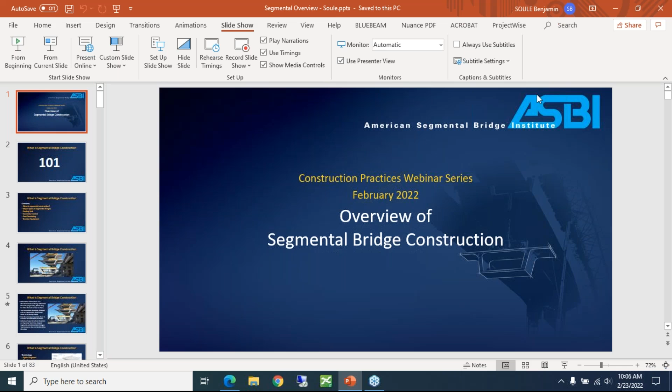All right, well thank you very much. I'm thrilled to be here today to talk to everybody, and I can assure you that that picture you saw was about the midpoint of my anniversary, but I'm at least confident that my picture is not any older than the one that Tom Stelmack had there.

So today, this is meant to be a real basic grounding in segmental: what it is, how it works, what the terminology means, how things are cast, how they come together. So if you've had questions you've always wondered about, never really understood what a term meant, or how things really come together, this is the place. Don't be shy to ask, this is what it's for.

If you are an old hand and have been to 15 different ASBI conventions and built a handful of projects, you may not learn a whole lot, but you get the PDH either way, I suppose.

So a quick overview of what we're going to talk about today: what segmental construction is, run through some of the major types of segmental bridges, and just talk about how they come together. We'll look at a casting yard, how a casting yard works, geometry control, post-tensioning, and erection equipment. This tends to run a bit long, so I'll try to auctioneer my way through this presentation.

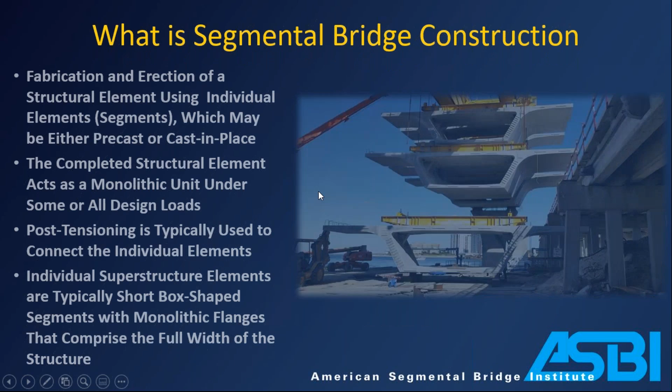So what is segmental bridge construction? Well, segmental bridge construction is a technique where the bridge is divided up into pieces. Whoa, that is not what I meant to do. Well, I'll leave the picture on there, it's a little better to look at.

A lot of people in bridge construction are familiar with the idea of working with girders, taking longitudinal slices of the bridge for each girder line. Segmental construction is really 90 degrees to that. The bridge you want to build is cut up into slices, so you take transverse cuts along the bridge, and those pieces are fabricated individually, either on site as cast-in-place, or off-site as precast.

These pieces on average are roughly 10-foot slices. If you've got special conditions, you can do a little bit longer or a lot longer than that, but order of magnitude you're dividing the bridge up into 10 to 15-foot slices, making each piece individually, and then assembling them on site to create the completed structure. And that's where the post-tensioning really comes into play.

A little bit of terminology on some of the parts and pieces to get oriented. A typical segment is what you see here, sort of along the length of the span, the basic shape. A lot of segmental construction, probably close to 90%, uses this basic trapezoidal box girder shape, proven to be efficient and economical. So a typical segment is just one of those 10-foot slices you'd find along the length.

A pier segment tends to be a little different. When you get to a pier, you're transferring a lot of load from the span into the substructure, so you're going into bearings a lot of the time. Sometimes you might have a monolithic connection, and there's a lot going on there force-wise, so you need a diaphragm, this concrete infill, to achieve that transfer from your typical section into your substructure.

A variable depth segment: a lot of times if your spans get longer, you want them deeper to give more capacity at the pier, and you can see that as it heads over this way. Usually you keep the top part the same and the bottom gets taller as you go towards the pier, so you'd be skinny in the middle of the span and taller at the pier.

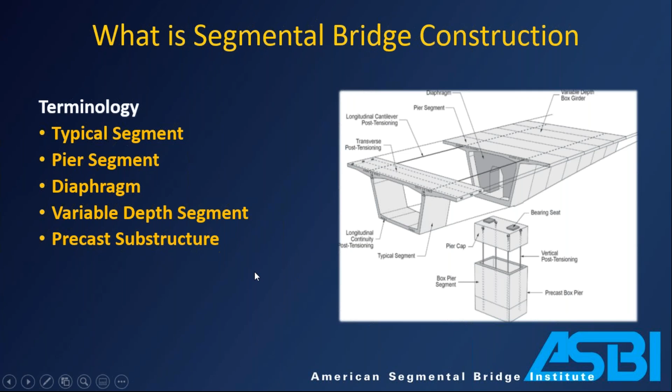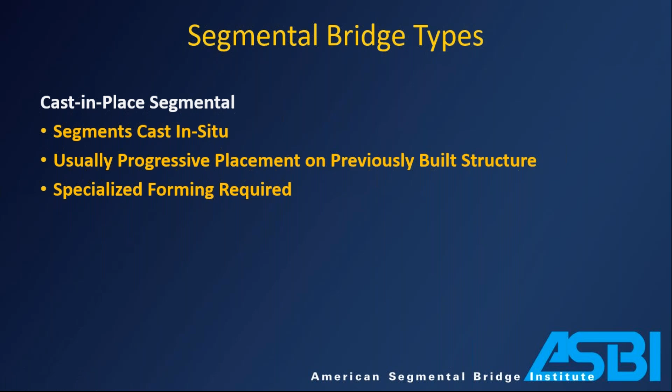First we'll run through the different types of segmental bridges, starting with cast in place segmental. This means you are casting these pieces more or less right where the bridge is going to exist, along the alignment, working your way out in pieces, in segments. Mostly this is used as progressive placement of some kind on a previously built structure - you're building your way out, and you have a lot of need for specialized forms.

By far the most common bridge in this category is a balanced cantilever. A lot of times you'll see 3-span balanced cantilevers done cast in place - that's a very typical usage. These are usually in response to one-off difficult crossings - maybe you need to get over a river, rail yard, highway, something else. You need a longer span and you have pretty poor access on the ground, so you'll see that for the main span, and the construction technique really lends itself to a 3-span configuration.

The way it works is right there in the name - it's a balanced cantilever. You are building out from a pier in cantilever, starting at the central pier and working your way out - that's the cantilever part. The balanced part is you're doing it on both sides, so you don't want a big imbalance from one side to the other as you build. You're staging your way out, working from the center, balanced cantilever. When the cantilevers coming from two adjacent piers meet, you secure them together and cast a closure.

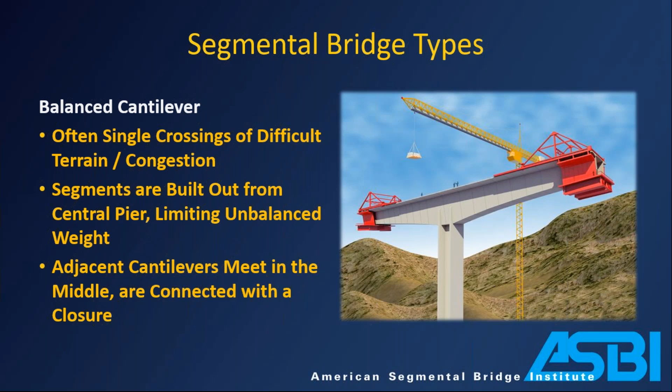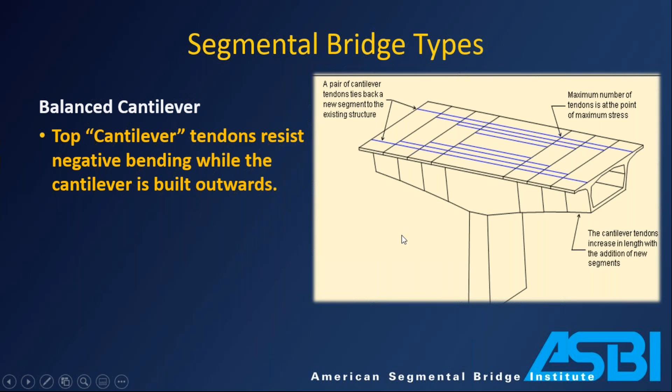You have a continuous span. For a lot of these I'll give a schematic of the PT. While you're building the cantilever, you are stressing cantilever tendons - these are the tendons you see here in blue, in the top flange, counteracting the negative moment from the dead load cantilever. Every time you cast a segment, you're stressing a tendon to counteract the action of that segment. This is a cutaway view - obviously the bridge doesn't look like this - looking at the bottom slab.

Another type of cast in place bridge is cable stayed. These are obviously less common, and really just an extension of the same logic - you have something that's difficult to cross. In this case they're usually a whole lot bigger than what you'd do for a cast in place balanced cantilever, getting up into the 1,000+ foot range - these are major crossings. The concept is very similar - you're really doing the same thing, building your way out in cantilever from a center pier.

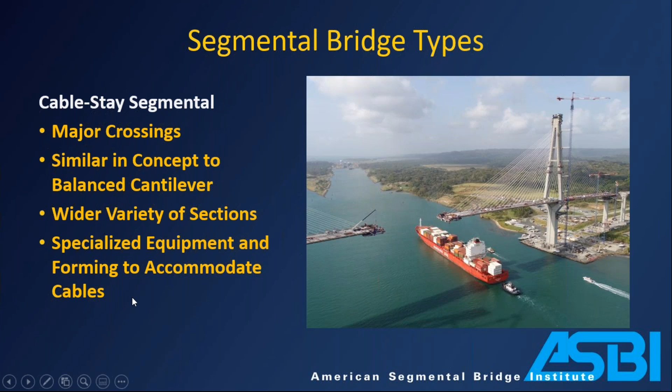In this case, you're substituting the cantilever tendons for the stays, but they're really playing the same role. They're giving you that capacity to handle the bending as you work your way out. The one major difference between the two, other than the cables, is you need to find a home for these cables, a way to anchor them. You have a real big concentrated force in a real small area, so you need to find a way to put that force into your structure safely.

A couple of ways you do that: you see a lot of anchorages along the edge, that's the edge girder type application on the left. You'd have that on both sides of the deck, running your way out. It looks a lot like a typical blister, only difference being they're usually a whole lot bigger.

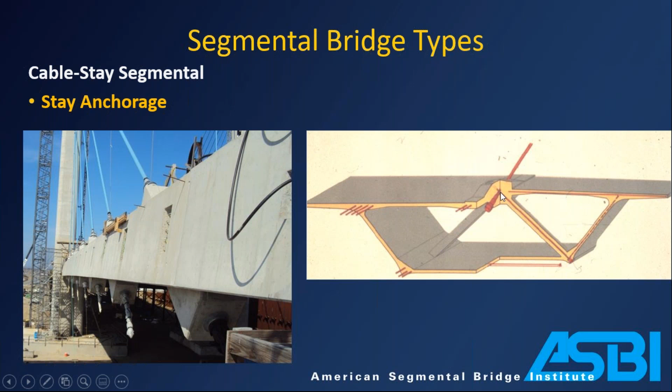The other one is on the right, an old picture. This goes way back in segmental, but it's the idea of a delta frame. There are different ways to put this together, they can be concrete or steel, but what it is, is a way to take the concentrated load coming from the stay and distribute that load into the webs of the structure. You have a vertical load, you want to get that into the webs, so that delta frame does the job of distributing the load. And then you have a big blister to house the reaction from the stay cable.

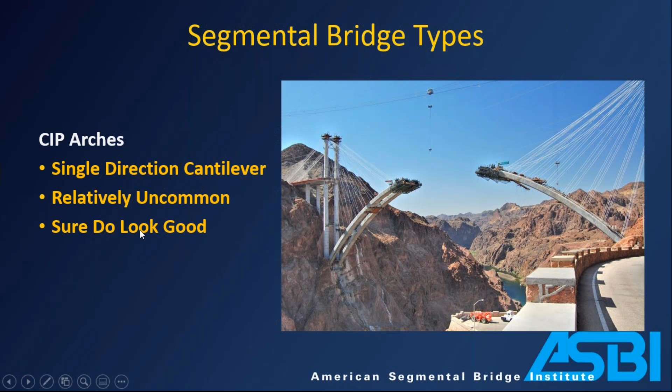Getting even more rarefied, you can use cast in place segmental for arches. Pretty similar, but in this case it's not a balanced cantilever situation, it's a unidirectional cantilever. You need a way to keep that under control until you have continuity. In this case, this Hoover Dam Bridge, they're using these temporary stay cables to stage it. Once they meet in the middle, there'll be a closure pour and those cables will be taken down. You don't see it very often, but they really are impressive when you do.

Relatively rare, but it's good for certain circumstances where you have poor access on the ground but don't want to make an investment in major equipment. There's not a lot that you need here to make this work, so it's one that you see that falls into the cast in place segmental family.

Touching on the PT for those incremental launches, you can sort of intuit as you're pushing this thing across, you're going back and forth between positive and negative moment. You're supporting it everywhere at one time or another. So you need tendons really every which way, and they end up looking like this. You have tendons going up and down, and really you're just compressing the heck out of that section to make it work as you push it along.

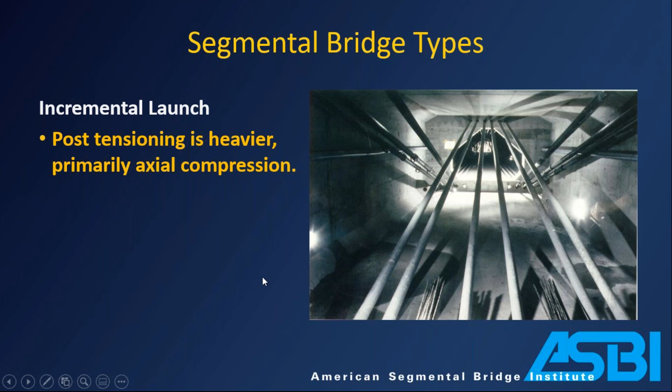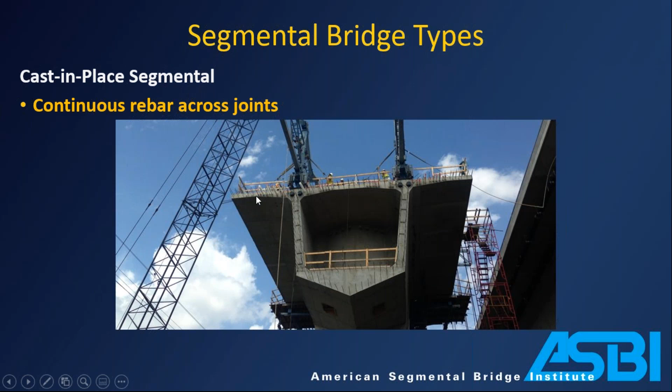Something to point out about all of these cast in place methods is that because you're casting directly against the other segment, you have the opportunity to have continuous rebar. That's what you see here in this picture, the segment that was cast earlier. They're going to cast another segment against this, and you can see a lot of rebar sticking out. Because your first pour is your final pour, they never come apart, and that gives you some advantages. You can see there are not a lot of shear keys on the face of this segment, you don't need that as much because of the continuity from the rebar sticking out.

Now switching gears a little bit, I'm going to talk about precast. In precast, it's an entirely different situation. The segments are precast offsite, they can be quite far away, 100 miles away. They are transported to the site and assembled. You usually need some specialized equipment, both in terms of casting the segments, you need the forms and molds, and to assemble the segments. This tends to be used in more high volume situations, maybe you have poor access, a job over water, somewhere you can't put down falsework, a congested city, something like that. But you do need a fair amount of volume to make the investment in the specialized equipment worth it.

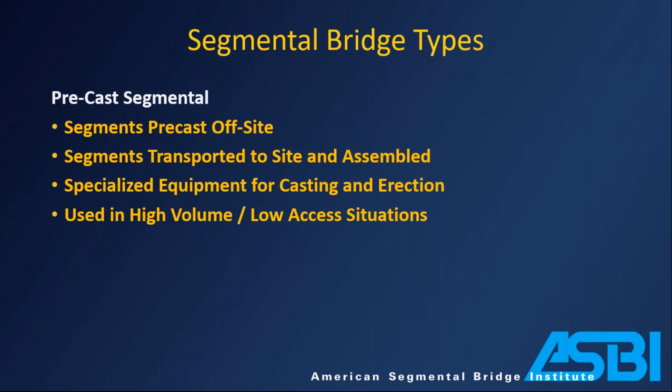So going to walk through the basic types for precast segmental, starting with the easiest one, and you can tell it's the easiest one because it's called simple spans - span by span erection with simple spans. It's the very first thing you learned in an engineering class, just a beam supported on either end, free to rotate, easy. You can almost design it by hand.

So it's just a simple span supported on a pier on either end. It's probably the fastest way to build - there are no closure pours to deal with, you can just keep going, and you have the shortest erection cycle. The downside is it's a simple span, so it's going to have the most limited span range. The sweet spot for these is on the order of 120 to 125 feet. You can see a little bit of nibbling around the edges on either end, but that's roughly where you're going to live with that type of construction.

Next - oh sorry, forgot PT. So the PT is, again, very simple. It's self-contained within the span. It anchors in the diaphragm on either end, and it follows a drape pattern to give you resistance to the positive bending that you see for a simple span. So very straightforward, kind of easy to understand how that works.

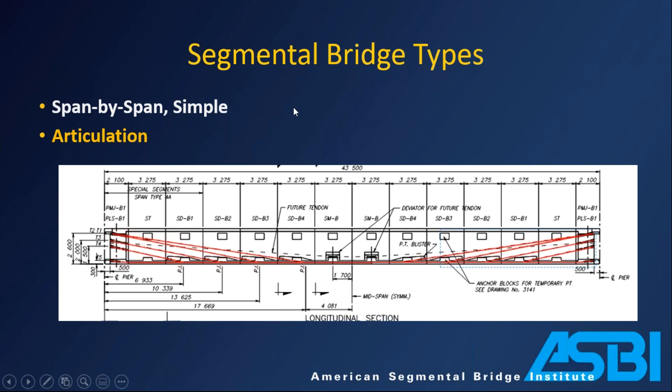The next step up in complexity is span by span made continuous. In this case, you are still building one span at a time, working your way along the alignment. The difference is with each span, you are creating continuity with the previous spans. This is done with a combination of closure pours between them and post-tensioning that overlaps. So it does have a slightly longer erection cycle - you have to take some time to put in these closure pours, a day or two on an erection cycle. The reward is it allows you to push your span lengths out a little bit longer.

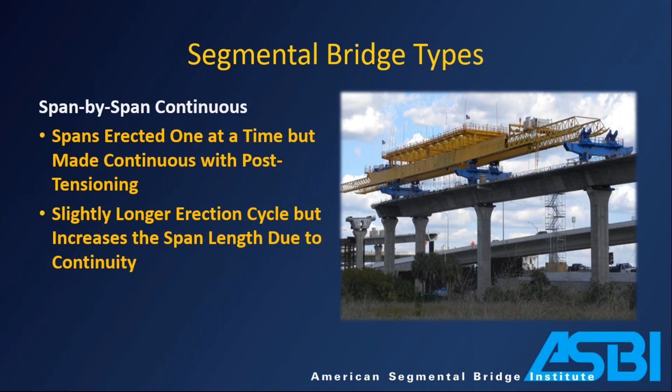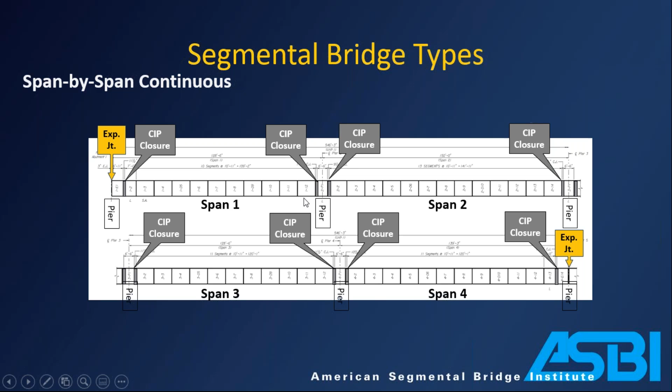Here's a schematic of how that looks. This is a 4-span unit. You can see there are closure pours at the piers, to keep the geometry going well and to create that continuity from one span to the next. So there are a number of those to pour as you work your way out.

It's subtle - a lot of people would look at this and say, well, that's the same PT you just showed me before. The difference is over here: if you look at this pier segment where you have continuity, you'll see these tendons overlap with these tendons. That gives you that continuity. It gives you the compression for negative bending over the pier, and it creates more of a continuous unit. Usually you see these from 3 to 5 or 6 span continuous units.

Now we talked about balanced cantilever for cast in place. You can also do balanced cantilever with precast - very similar in concept. The difference is that instead of casting these segments in the cantilever as you go, you are casting them elsewhere and assembling them in cantilever. But the idea is the same: you're adding a segment to either side, working your way out in a balanced cantilever, stressing cantilever tendons as you go to combat that negative moment.

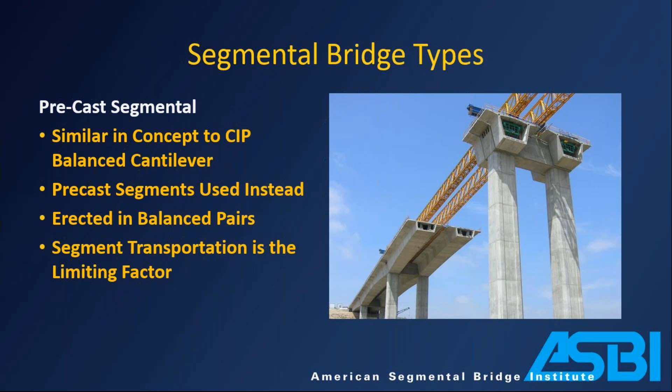The big thing with these is transportation weight, and that's really the limiter on what you can do in terms of span lengths. This is one that was done on land. Roughly speaking, they can be divided into delivery by land, taking things over highway, and delivery by water.

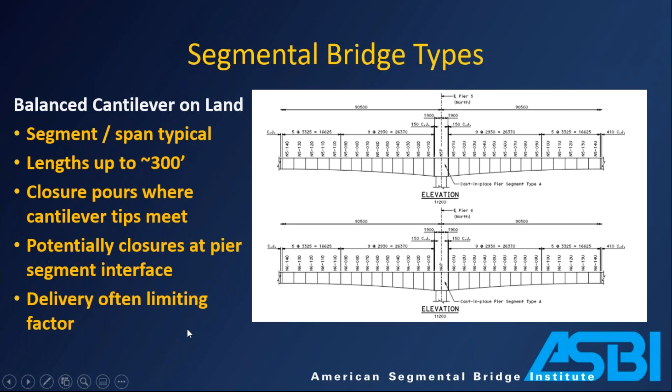When you're delivering by land, you're typically limited to about 15 or 16 foot depth, and that's going to reflect itself in limitations on your span length, somewhere up to around 300 feet. So you would build this out to 300 feet, and when the tips meet together, you have a cast in place closure joint between the two cantilever tips. Sometimes you might have construction joints at the pier table too - those can go either way. There are lots of ways to address that particular problem, but the delivery is often the limiting factor - the weight, the height, what can you get on site.

It's not as clear as I hoped, but this is an example of the Oakland Bay Bridge where delivery was by barge. So there was a lot more flexibility in a project like this to go big.

So the span lengths were a lot longer here, getting out close to 500 feet I think. The segments were a lot bigger, too. They weren't limited to that 10-foot length. Everything was done in water, and you could take bigger bites on a bigger bridge.

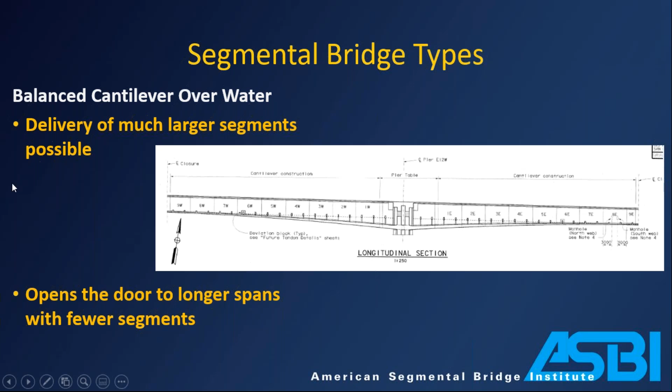So those are kind of the things to think through when you're laying out a project like this: how am I going to get things there? How am I going to erect them? What sort of access and delivery do I have?

Again, segment transportation and planning the moving and erecting of the segments is an absolute must. How are you going to get them there? How are you going to lift them? How are you going to deliver them? Are the stays going to be in the way? If you're trying to deliver them over the deck, do I have access to pick them from the water? Those are certainly things you need to think through as you work on a concept like this.

So the last thing for the precast options is precast substructures. I guess if we really wanted to, we could claim that regular cast in place columns done in lifts are cast in place segmental. Nobody's really tried to take ownership of that yet, but you can also do precast substructures. It's a nice, very efficient, very quick way to put things together. The segments are cast just like the superstructure. They're post-tensioned together, a combination of bars and tendons usually, and post-tensioned into a cast-in-place foundation.

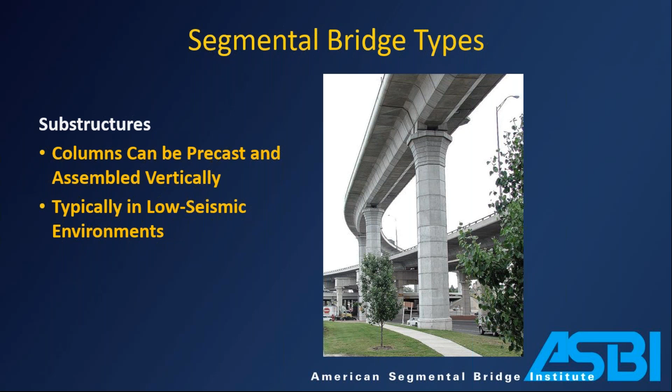So when and where do these make sense? Well, they make sense from the point of view of speed. They're very nice, they come together very quickly, but there's a little bit of fuzziness when it comes to how well they do in seismic zones. I don't think the ductility requirements are well understood or appreciated in a lot of places that have high seismic - your Californias, Washington, what have you - typically don't want to see these. But somewhere like Texas, it's a much easier sale when they make sense.

A couple of things about that are sort of common to all types of precast segmental. We talked about shear and alignment keys. So this is what the face of a precast segment looks like as it comes together. And you notice there is no continuous rebar here, right? You cast them together, separate them, bring them back together on site. All those bars would get smushed.

So there are no continuous bars. That does have implications for design - it means you have to be a little bit more conservative in other places in the design of the bridge. Construction-wise, it means you have a lot more of these shear keys. You can see the hardest working ones, the highest density of these keys, are along the webs to help transfer that shear. We also have a number along the top and bottom. Sometimes people call these alignment keys, and they do play that role. As you bring the segments together, they force any little imperfections or deflections in the segments to match up well, so you don't have little bumps where the segments are meeting. Those are alignment keys.

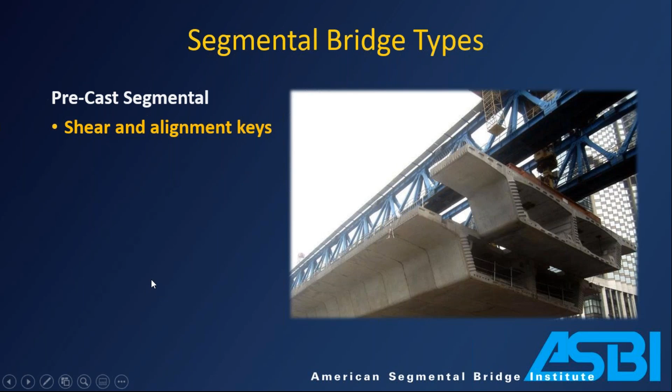All precast is connected with epoxy. Some of the old timers like me and above will tell you there used to be a day when you didn't use epoxy on certain types of bridges, but at least in the US, those days are gone. According to AASHTO, all precast segments need to be epoxied together when they are assembled on site. So this is an epoxy you can see I'm applying to the face here. Read your specs carefully, make sure you understand your needs for epoxy, whether it's one side or both sides, and what you're supposed to do with ducts and things like that, and understand the limitations of how long you have to work with the epoxy. It'll start to harden within an hour, depending on the product and the temperature - it can take a little bit longer.

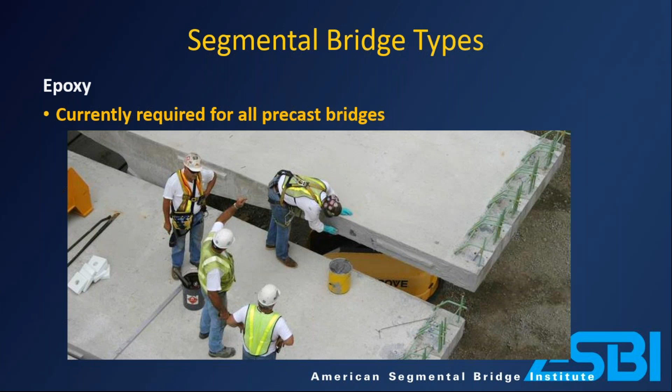Now, just joining them together with epoxy is not quite enough - that epoxy needs to be squeezed. In almost every type of segmental construction, you'll have some sort of temporary compression to squeeze the epoxy together, to make sure it's really getting in, that you have a good flush connection between two adjacent segments. So hopefully you can see what's going on here - there's a segment joint over here, these post-tensioning bars are squeezing that segment joint together, the epoxy comes squeezing out. Make sure you have a good finish and that it's really sealed all the way around the perimeter.

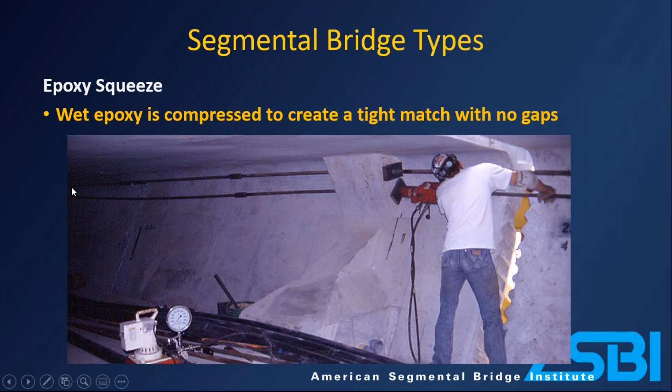So next topic, casting yard. This is for precast only. Obviously, you don't have a casting yard for cast in place.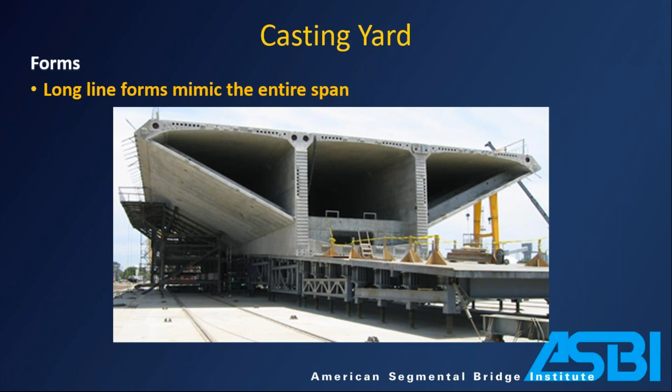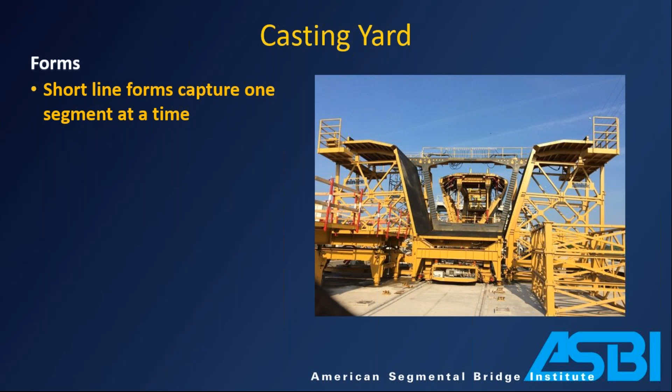And then they have some movable forms as they work their way along the side to cast it. So you lay out a cantilever or a span all at once and then cast it in pieces and separate them. Short line, you are casting one segment at a time. The form can only accommodate the length of one segment, so you're constantly rotating out and putting new segments in to match cast against them. So much smaller investment in form. You can fit a lot more forms in one place, but again, it's the most common type of construction that you see. A few parts and pieces of the short line casting setup.

So how do the forms work? What are the major pieces? So this is the setup for casting a segment, and it shows you a couple of things that are important here. One is that segments are match cast.

What does that mean? It means that each segment is cast against another segment. That's how you get the geometry. That's how you get them to mate up properly when you assemble them in the field. So this segment here, a previously cast segment, is a match cast segment. This empty spot in the form is where we're going to cast a wet cast, or new cast segment.

So you see the external form, that's the outside shape of the segment. Here in red along here is the fixed bulkhead, so that'll create that face of the segment. You have a core form. The core form needs to be able to slide in and out to form the interior void of a segment. So this segment will be cast against that one, and it'll be formed by those four sides.

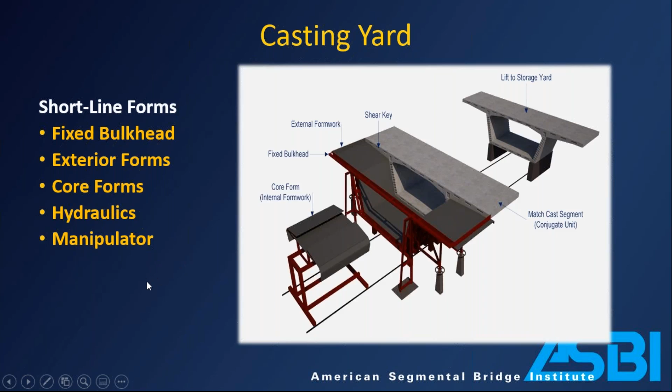So I have a short video of how that comes together. Hopefully this will come through nicely. So here's the segment that's going to be used as the match cast. It's adjusted to get the right geometry. It's on hydraulics to let it move around.

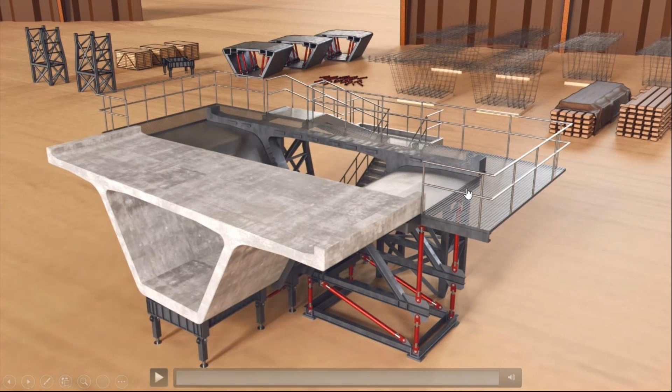You bring the rebar cage in. The core form slides in from the end. It gets filled in with concrete, hardened, and then the match cast segment is taken into storage, and the segment you cast the day before is moved into the match cast position to cast the next one. So this is ideally on a daily cycle.

You certainly want to turn these forms as quickly as you can, and every casting yard aims to try to get a segment per day per mold. And to do that, it helps to do a lot of prefabrication, especially the rebar and the post-tensioning that is going to get cast into the segment.

So usually behind the molds or in close vicinity to them, you will have a rebar jig, sort of a template, so that the rebar for tomorrow's cast can be tied today. All the PT hardware is tied in, and you get the whole shape so that it can be lifted, just like in that video that we just watched, all in one piece when it's time to cast the segment.

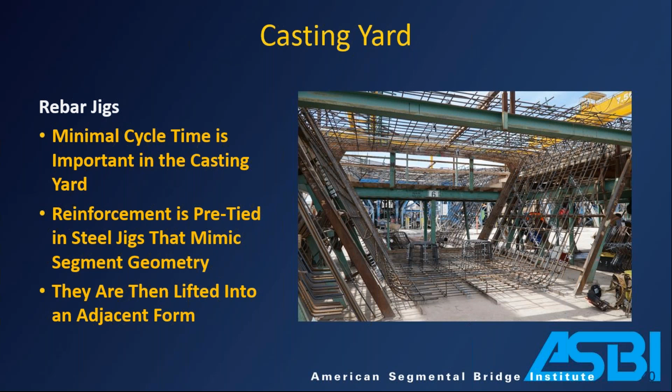I sort of just casually mentioned that the segments are taken away and put into storage. You need equipment that's going to take them away and put them into storage, some sort of lifter, a Mi-Jack type situation like this. So that needs to be accounted for in a casting yard and in the design of the segment when you pick it up and move it around.

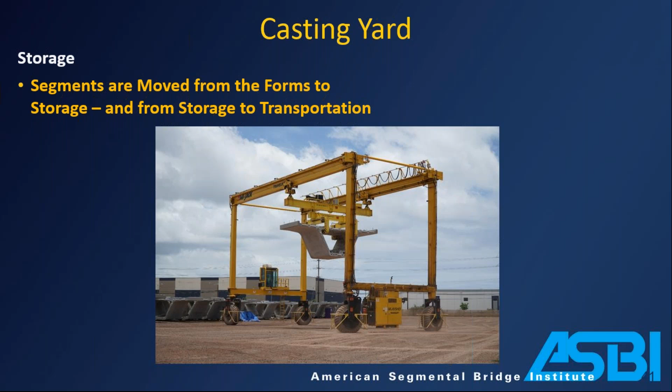And storage - you see a lot of pictures like this of segments cast in storage. Depending on the size and layout of the yard, you are going to need to store segments for a while. At a bare minimum, segments are usually 28 days old when they're erected.

So this is really the way that they're always stored, this 3-point support. Why do you do that? You don't want them rocking. If you put in 4 points, it's like a 4-pointed stool, and you always have one corner that's a little bit lower than the others. In this case, it's not the rocking that's the issue, but the fact that since concrete creeps over time, it'll start to try to twist to set itself down on that 4th support.

And then when you fit them together in the field, they won't fit together as well. So you always want a 3-point support, one under one web, 2 under the other, to prevent that twist from creep.

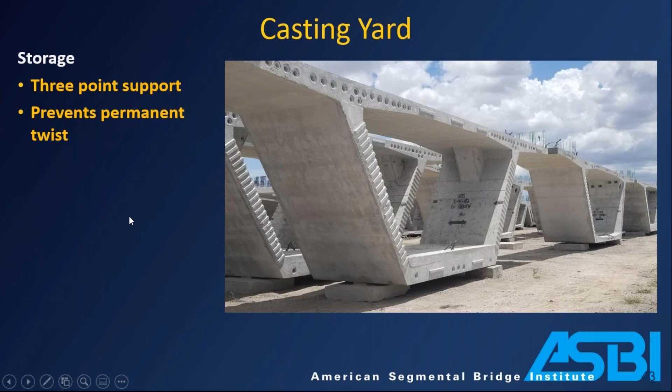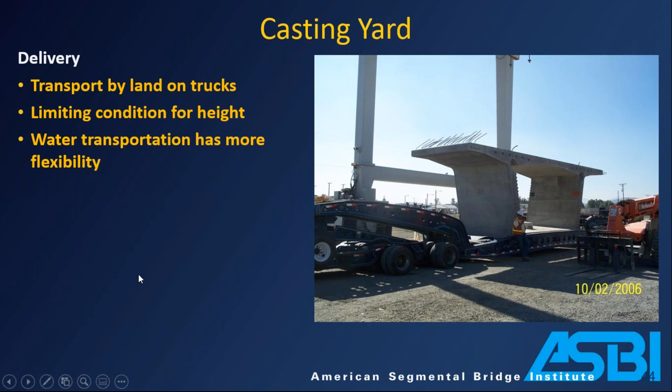Water transportation, of course, has a lot more flexibility, and limiting is usually around a 15 or so foot segment. As you plan this out, don't forget about these - if you have barriers, parapets, anything like that sticking out, that adds onto the height. You can see these were bent over in this case, and sometimes for taller segments, people will use couplers to limit that height. So make sure you're all in on your clearance envelopes.

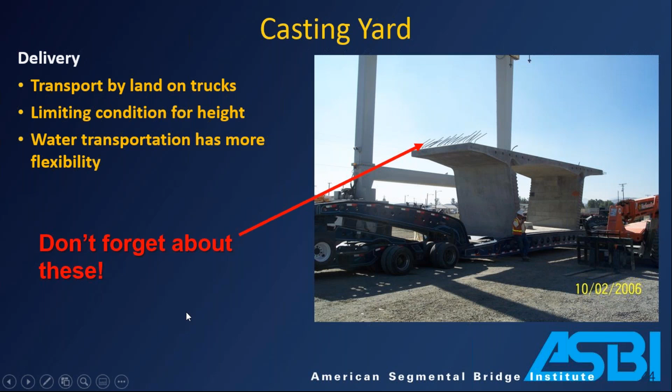Now, next topic, geometry control. Geometry control is really a key part of how this works and how everything comes together. Understanding geometry control is really one of the more challenging parts of getting your head around all this.

So if you're working on a fairly conventional bridge, cast in place, casting a deck on a typical girder bridge, you're on site. You have an alignment, you can survey where it's supposed to be in space, and that's where you are setting your forms. There's a relationship between where you are working and the geometry and the profile that's on paper. With segmental, that's not always true.

Cast in place construction, obviously you're a lot closer, but it has its own challenges in that it's a moving target. Precast construction, you are casting things miles away, so you're nowhere close to the site, you're not surveying it into position in any way. You are trying to recreate a geometry somewhere else that you will then transport to the site and assemble and follow the correct geometry. So it takes a little bit more thought. I'm going to work through the two different types of construction, cast in place and precast, to see the big picture of what we're trying to achieve and how it's achieved.

So in cast in place, this is a bit of an extreme example, but this is a cast in place balanced cantilever on a very tall column. Just intuitively, you can look at this and appreciate that when I pour tons of concrete on one side, it's going to lean over, right? And then when I go back and pour concrete on the other side, it's going to lean back the other way.

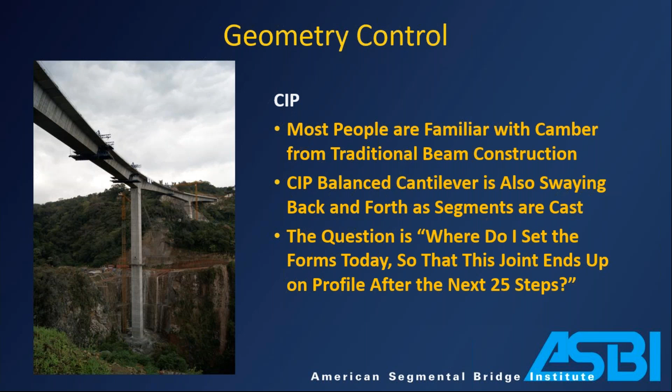That's what I mean about a moving target - a lot of cast in place construction involves things moving around as you're casting the concrete. The question that really gets to the heart of that is: where do I want to set my forms today for this pour, so that when I'm done rocking back and forth, stressing tendons, and doing all the things I'm going to do, I end up at my target elevation. So that's the goal - you need to set your forms somewhere that is not on the profile, so that when you're done making all these steps, creep and shrinkage is part of that too, I want to end up somewhere.

But the number you have at the end, after all your construction steps, after all of creep, is the total deflection it's had over time. It starts at zero - whatever deflection you get at the end of all that stuff, that's how much it's going to move from the time it's built to the time you're done constructing. So that is the number you use to set the forms, right? If you find out that at the end of all that, it's up above the profile by 3 inches, then you'd want the form to be down 3 inches when you cast it, so that it ends up at zero.

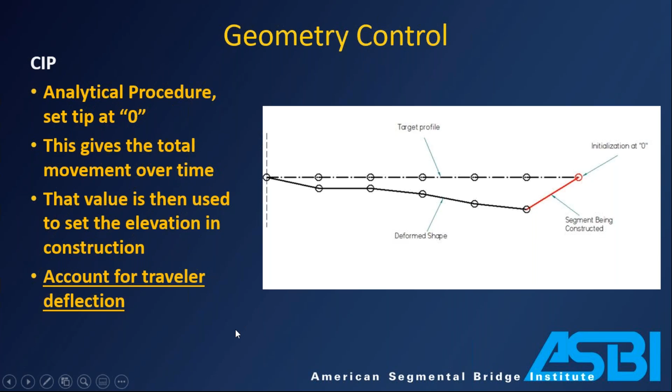Precast is a whole different kettle of fish. With precast, you're trying to recreate the geometry of a span that can be doing all kinds of things out in the field - you might have a bridge that's curved in plan, going through a vertical curve in profile, or twisting - a change in crossfall as you go from one end to the other. So you've got all these geometric variations you want in your finished bridge, but all you're doing is casting one segment at a time, taking 10-foot chunks and casting those in one of those forms I showed you earlier.

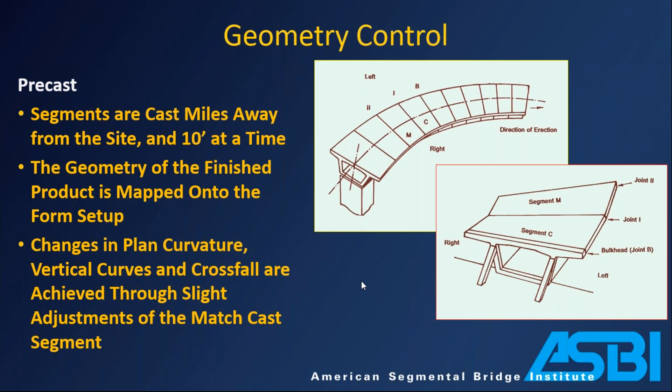So the whole idea is that you want to look at each 10-foot chunk and recreate the relative relationship between two pieces in the form. If you're looking really focused on two segments and say, okay, I've got a horizontal curve, curving in plan - that means my segments are going to be a little bit wedge-shaped. What does that mean in the local sense for these two segments? What is the relative degree of wedge shape I need for those two segments to match up and follow the curve when I erect them out in space? So you're zooming in on two pieces, looking at their relative relationship, adjusting that as you cast it, and then when you take it out in the field, they fit together the right way.

Once you do, you cast it, move that segment out, and repeat the process, maintaining the relationship between those two segments. The exact same logic you saw in plan view, adjusting the match cast segment back and forth so you have the right wedge shape. That's exactly what you do for a vertical curve, and for a twist if you have a change in crossfall from one segment to the next.

So one of the tougher concepts to get through, but absolutely key to being able to cast things off site, bring them to the site, assemble them, and have them follow the geometry. A little bit of terminology when it comes to that. Now, I want to say this is a bit of an old school picture - this is the way it's been done for decades. You see some newer methodologies, but the idea is the same.

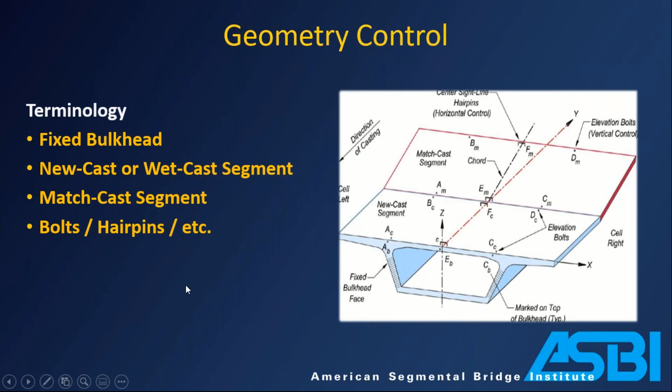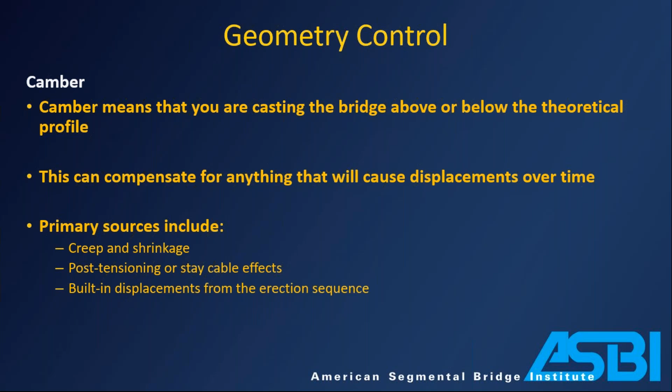A related but different topic is camber. Camber and geometry control are a bit different. Camber means you are casting at a different place than the alignment. You may have an alignment curve that is flat, but because you know there are going to be displacements between the time you build the bridge and the time you're done - that can be superimposed dead loads, paving, creep and shrinkage, or the effects of post-tensioning - you compensate for those with a camber curve. So that's kind of in addition to the alignment they're trying to cast.

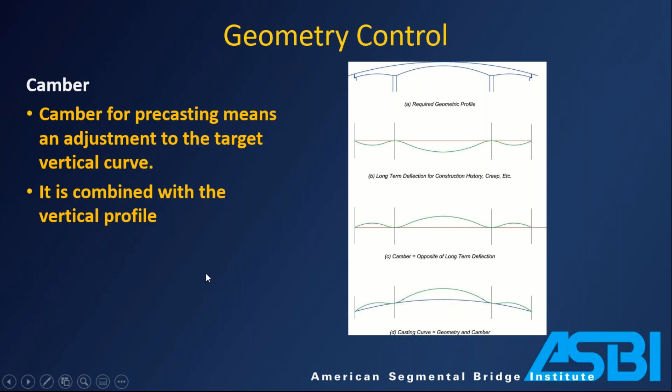All right, two topics to go here. So, post-tensioning. Post-tensioning and segmental are really hand in hand - you can't have segmental without post-tensioning. So it's important to understand how it works and what the parts and pieces are.

Now, since this is 101, you hear the words pre-stressed and post-tensioned. If you're not used to it, you may say, what's the difference? Who cares? Why does that old engineer keep correcting me when I use the wrong one? Pre and post of what? Well, pre and post of concrete hardening. Pre-stressed means you stress the tendon before the concrete is hardened, usually in an empty form, something like that.

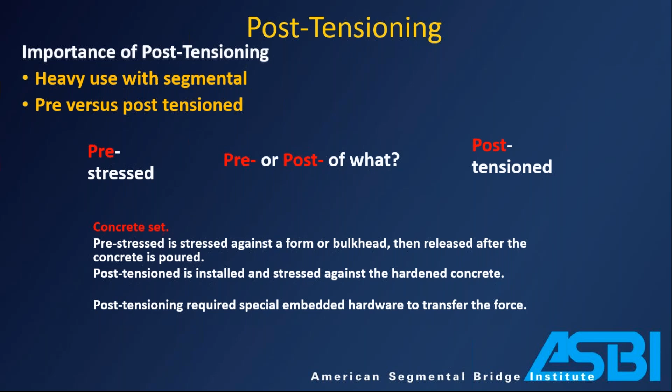And then it is released onto the concrete, but the stressing comes before you have concrete. Post-tensioned is on hardened concrete. So you cast it, let it harden, and then you install and stress the tendons. And that means you have to have special embedded hardware to put the tendons in and to stress it, and to transfer that force into the concrete.

So a quick rundown on what some of those parts and pieces are. You have strands, so individual strands of tendons. Each strand is usually composed of 7 wires, and one strand is ballpark the diameter of your finger, maybe your thumb. Multiple strands create a tendon. You have them anywhere from 4 strands up to 30-ish.

The force from those strands is transferred to the concrete through the anchorage. That's this metal piece here. For segmental, you see a lot of these multi-plate anchorages. That means you have multiple fins through the anchorage hardware.

Each individual strand goes into a wedge plate. That's that darker piece here, where it's anchored with a wedge. These wedges are usually 3-part wedges with teeth on them. That's what grabs into each individual strand and holds it fast into this wedge plate that bears against the anchor plate. You also have a spiral or some kind of confinement reinforcement, and that helps the concrete handle that big compression load that the anchor is transmitting to it locally.

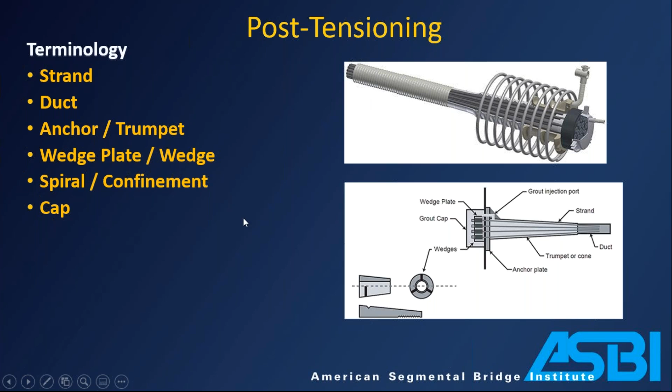And then you have the ducts along the length. Oh, I forgot the cap, but we'll talk about the cap in a minute. So here's a nice review. This is all one project. This is sort of the life cycle of post-tensioning hardware as it gets built and installed in the field.

This is a collection of those anchor plates. You can see the multi-plate anchorages just sitting there waiting to get assembled. This is after they've been assembled with the gathering collar and everything that comes in front of them, to pinch the strands together, the rest of the hardware.

Here they are tied into a not very congested pier segment. You can see these are all the anchors there with some of the forming around them for the blockouts. This is what they look like after they get cast. This is just the back face of the anchorage itself. You don't have a wedge plate on yet.

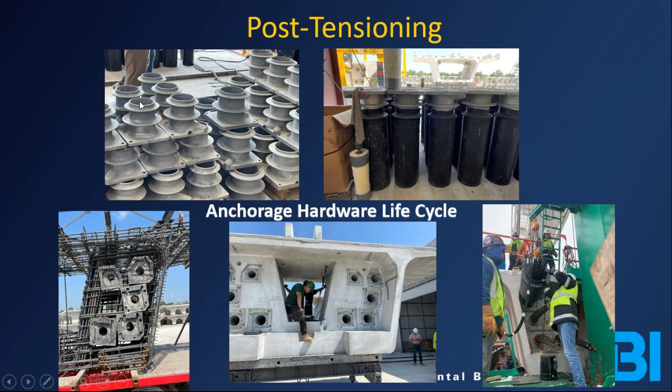And then as it goes into the field, you can see the wedge plates have been installed. Some of them have the strands installed, and one of them is there being stressed. So that's kind of an overview of the life cycle of how those things come together.

Now, there are 2 different types of post-tensioning, 2 different families: internal and external post-tensioning. Internal and external of what? The answer is the concrete section. An internal tendon is contained within the concrete cross-section. So that's when you see holes in the concrete cross-section like these.

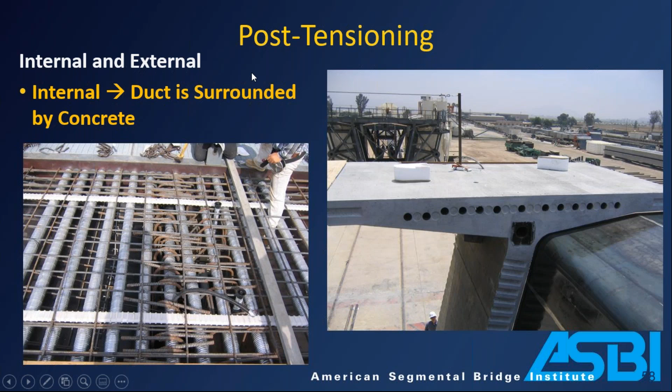There's a duct running longitudinally from one side to the other. It's part of the concrete section. Here they are before they get cast. So with internal, these are some of the things that you normally associate with them.

Embedded anchors, of course. This is like for a cantilever tendon where you would have access to the face to stress it as you're building. Internal tendons are where you tend to see blisters. Blisters usually house intermediate anchors, so you have to give access to those tendons after construction.

And then you have internal deviations. So all the curves and twists and turns of these tendons are taking place inside the concrete. So that takes some careful detailing. You need to make sure that they don't pull out of the concrete, but they're properly reinforced inside the concrete.

Most of the time with internal tendons, you see ducts that look like this. In older times, and in some jurisdictions, California is one, you still see a lot of corrugated galvanized duct. Mostly that's falling to the wayside, and you're seeing a lot more plastic corrugated duct. Those are used with internal tendons.

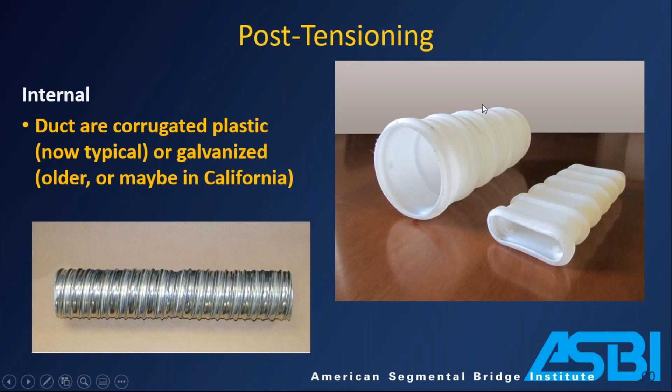The caveat to that, and we'll see it in a second, is when you are injecting it with wax, the flexible fillers, those use smooth ducts for internal tendons. So as that catches on, you'll see a bit of a transition there.

Another thing that you see with internal tendons sometimes are duct couplers. So you want to keep the inside in and the outside out. Duct couplers are a good way of sealing segments at the joints. Water has a harder time getting in, and things like grout or flexible filler have a harder time getting out. So it's a seal, a 2-part thing that is cast into the segment.

You can see half of it there. The orange half would have been embedded in the segment. That can be cast in. You don't always use these. This is really a case-by-case and spec-by-spec set of requirements. So again, read your specs carefully to make sure you know what's required for your project.

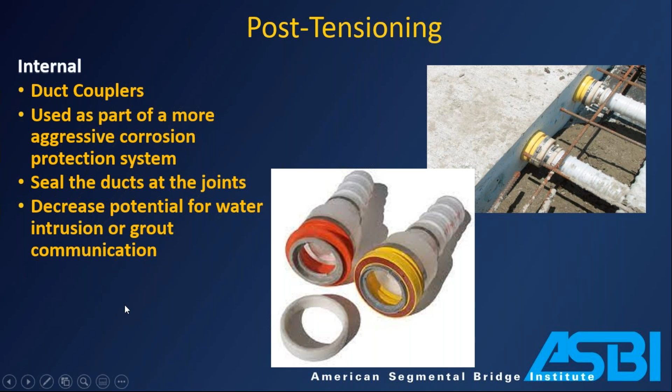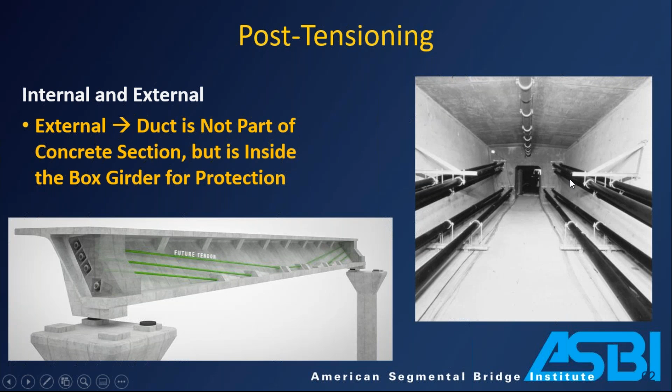With those, you have to have some way to deviate them. You've got these tendons inside this chamber, and you want a draped profile, so you need some way for them to change direction to follow that draped tendon profile we talked about. That's usually accomplished with some sort of special deviator segment.

It's a big force when these things change direction—they want to straighten out. So you need something to transfer that force, and you can see that's what's happening with these deviator segments, which take that deviation force and distribute it to the webs. There are a couple of different ways to achieve that deviation.

Another way is diabolo—you may have come across that word. Diabolo is basically a formed bell shape that follows a curve. This is basically just forming it; when you pull it out, you just have a bell-shaped void. In that case, the tendon and the duct are just continuous through this voided opening.

Why would you want one over the other? It's a question of accuracy versus space. You can see right off the gate the diabolos are bigger, so if you have heavy reinforcement, you have more to try to work around with diabolos. The upside is they're very tolerant for geometry.

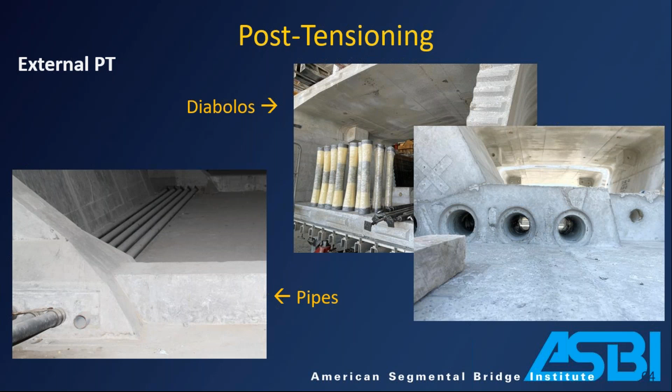They have to follow the tendon path easy enough when it's straight, but when you have curved sections, vertical profiles, and a lot going on in geometry, it's harder to make sure they line up so that they are in exactly the right place. So it's a question of tolerance on rebar versus tolerance on tendon installation. External tendons usually use smooth HDPE ducts—the black ones you see here.

They compress the deck and are great for durability. They do need to fit in a small space, so usually they use oval ducts to fit them in, to sort of shoot the gap on the very thin top flange.

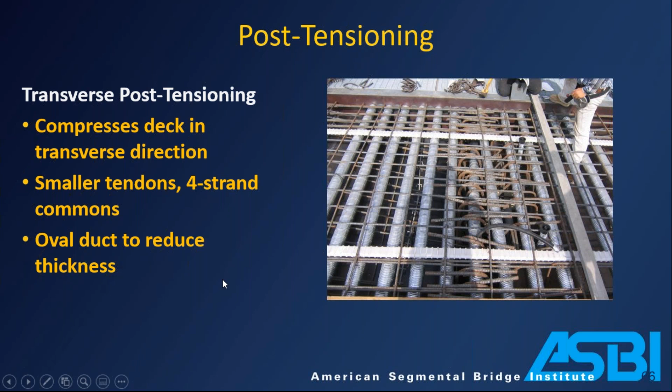There's been an evolution over the years from quick and dirty cement grouts to prepackaged grouts, and even an evolution in some places—again, Florida leading the way—using wax and grease. The idea is that protection of these tendons is really quite critical to the longevity and serviceability of these bridges.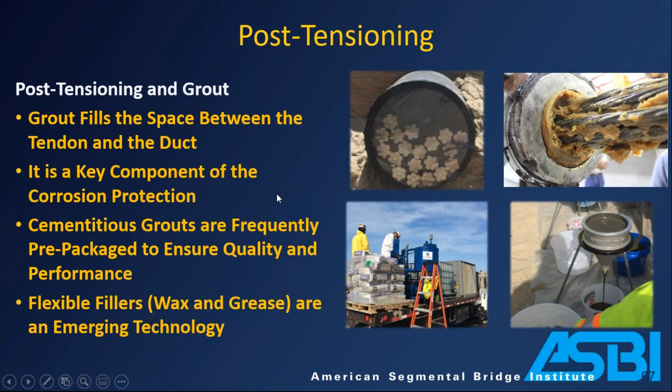So it is very important to do a good job—important to pay attention to what you're doing and make sure you do it well. Last thing about grout: they're part of the anchorage protection too. That's certainly a place that needs corrosion protection.

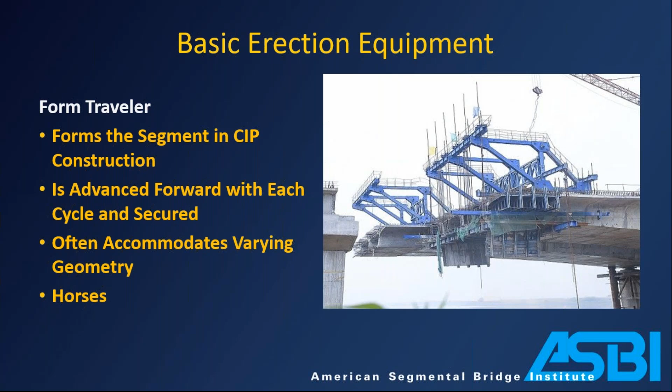They do get a little more complicated as you start looking at other types of construction. When you have things like stays to worry about and funny shapes to avoid, you need a lot of raising and lowering to advance them. So they can get to be very complex, very heavy, and it can be a pretty important part of the design - it's on the order of 50 to 60% of the weight of a segment. So it is significant when you're looking at the construction engineering.

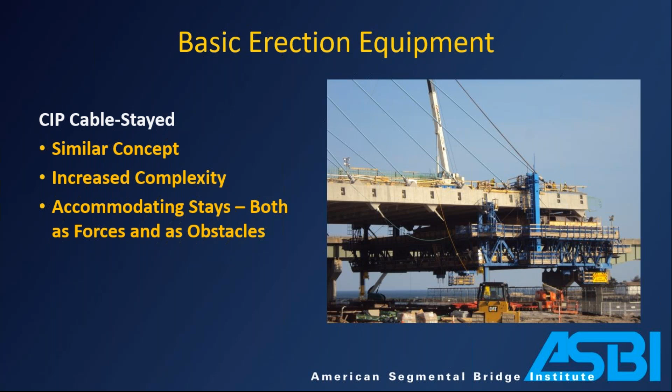Now for precast, one of the biggest tools that we use is the gantry. This is basically a piece of equipment that assembles the segments into their final position. It's how you support all of these things temporarily as you are doing that epoxy and installing the post-tensioning tendons to hold them together. Ideally it is both strong and able to move - you want to be able to build a span and then launch forward to the next span, and adjust for geometry.

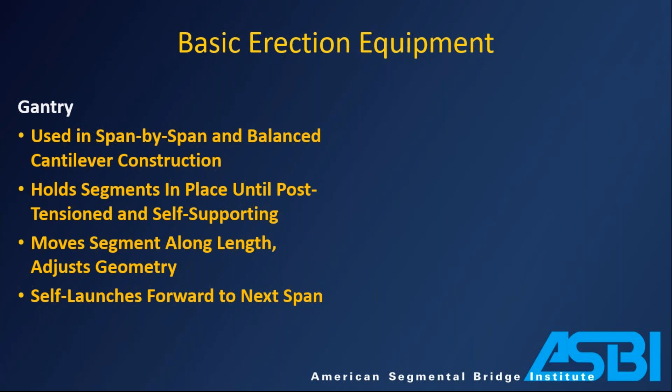These gantries are also very, very significant. Just pull a number, they're going to be at least 200, 300, 400 tons, depending on the span length you're working with and the size of your segments. Take a second to get the nuance of what you're looking at here. You've got a simple span that's built, bearing over here. This gantry that weighs hundreds of tons is sitting on top of it, supporting the weight of the next span. All of this is hanging off the gantry, which means it's going through these legs, which means it's going through this bearing. So a lot of weight, a lot of thought and engineering needs to go into these temporary steps, making sure the bridge can carry them when it's built.

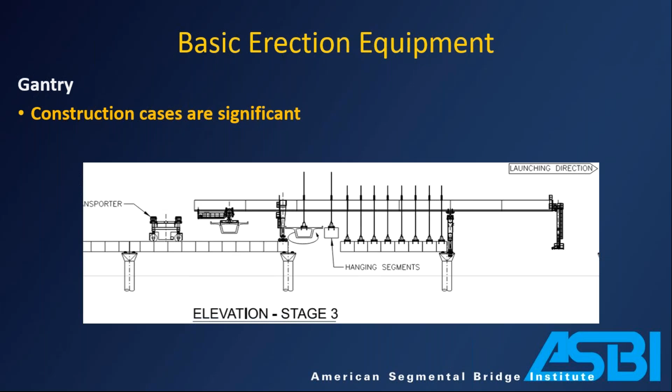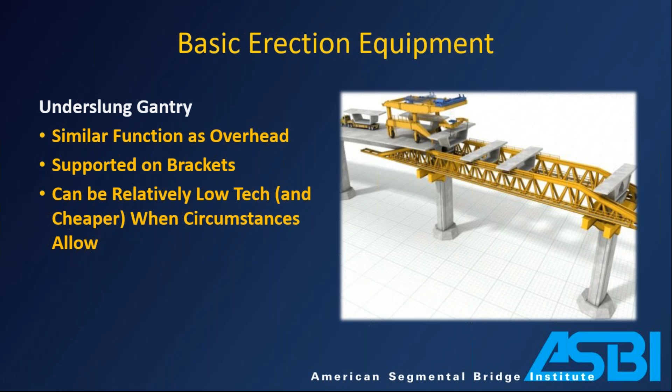Going to march through the different types of gantry, from simplest to most complex. There are 3 of them, starting with an underslung gantry. This has got a long history, a very simple way of doing things. The underslung gantries are just beams or trusses supported on the columns. You have brackets on the columns, and the segments sit in the armpit between the top flange and the web, supported by this truss. These can be fairly low cost, you can really make them low tech if you want. Some cases they're even advanced with cranes, so they don't have a lot of moving parts.

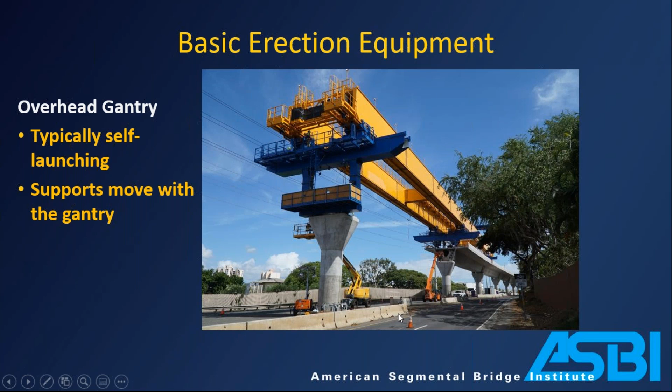The next step up is a more self-contained, all-in-one solution with an overhead gantry. This goes over the segments instead of under, and tends to have a lot more bells and whistles when it comes to self-launching and geometric capabilities. This is an example of an overhead gantry. You can use them to deliver segments from behind, so you deliver them to the tail and bring them forward, or if you have access right below, you can pick them straight up from below.

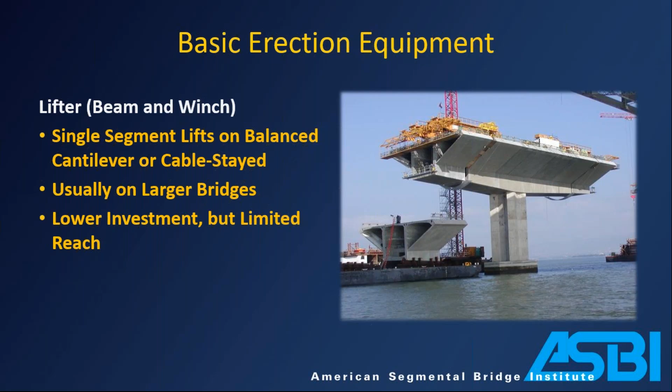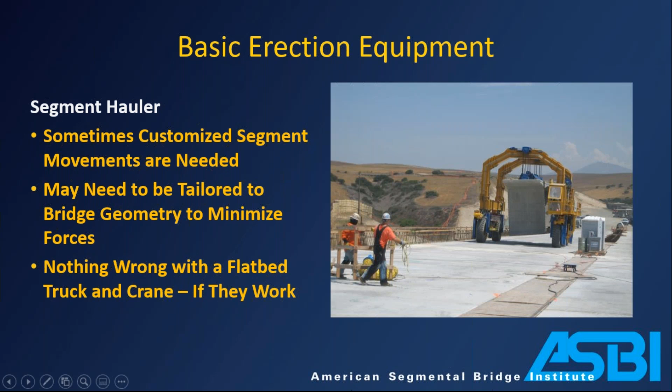Don't forget that you're going to need to move these segments around quite a bit, so you need equipment to move and transport the segments in the casting yard, on the site, sometimes on top of the deck. You need to make sure your equipment for moving things around is integrated with how you're going to use it. If a flatbed truck works, great, you can do that. Cranes are great if you have the space. Sometimes when you're moving things on the as-built structure, you want something a little more customized like what you see here. And really the last thought to leave you with is that it needs to be integrated.

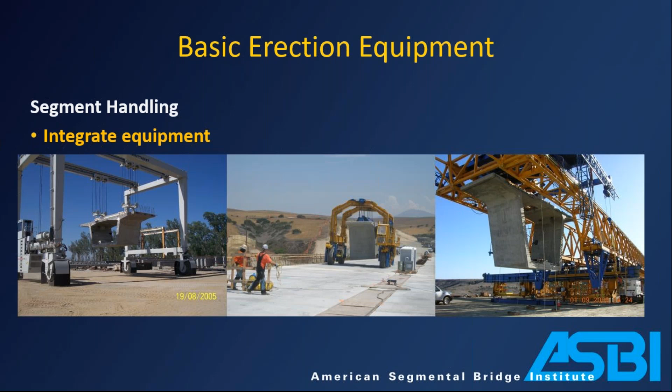Something worth thinking through. So that is it. I will stop my monologue here and turn it over to Tim.

Hey, I took up pretty much the entire time, but I'm happy to stay on for a bit and answer some questions. Great, Ben, fantastic presentation.

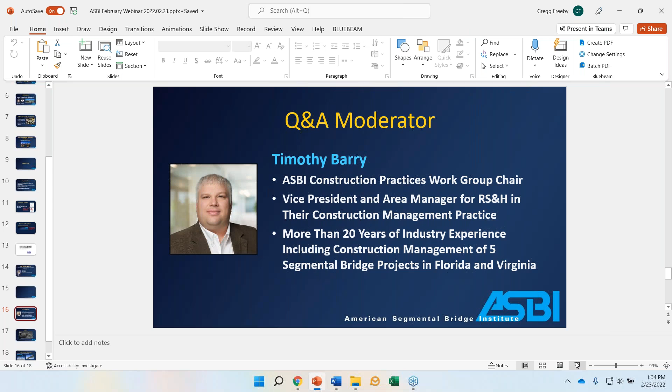Question about the diaphragms: are the diaphragms typically installed with the precast piece prior to erection? I assume this is referring essentially to the pier segment. Yeah, that's right, it's all one monolithic pour typically 90% of the time. Occasionally you'll find ones that are just too heavy - this is usually really deep things, you see this in unbalanced cantilevers where you may have some cast-in-place components. Off-the-cuff advice is to steer clear of that if you can, it does add a lot of complexity. So the basic assumption is that they are part of the precast segment, and usually the heaviest segment, as you might imagine - because of that, they tend to be shorter for that reason.

And I'll just add to that - sometimes on projects, because of the weight, they will actually be split in halves, so for either transport or just handling equipment, they'll split it and then epoxy it together and post-tension it together like you would any other pair of the segment. So yeah, that is definitely a problem when they get too big - it tends to control what size equipment you need on site.

So the next question involved cable stay. The question is, obviously you talked about the cable stays - is there still post-tensioning involved with a cable stay segment? Yes, there absolutely is. It's very much a case-by-case sort of thing, most cable stays are pretty unique, but the cables don't do it all - you definitely need some continuity. You still have things like epoxy if you're doing a precast that you need to put together with PT bars. And a lot of times you'll see a lot of cantilever tendons close to the pier to try to save one stay's worth of spacing and build it as a balanced cantilever. So absolutely there is - stays don't do it all. The volume and the ratios are a lot lower, as you might imagine. The stays are certainly there for a reason, but you have some.